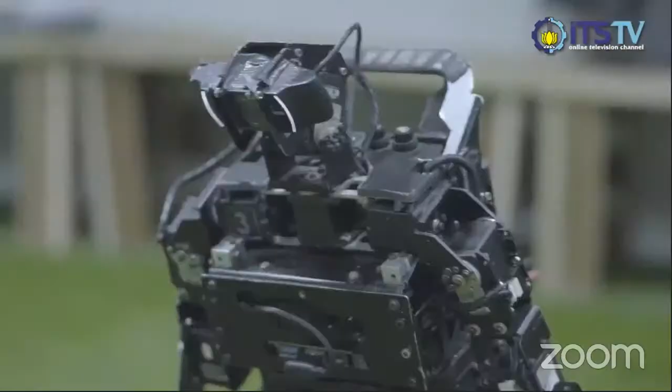ITS is a place for new hopes to grow, an ideal environment for the new generation to flourish in 3 strategic locations within the industrial city of Surabaya. As a smart eco-campus, ITS maintains harmony between technological advances and the sustainability of the surrounding ecosystem.

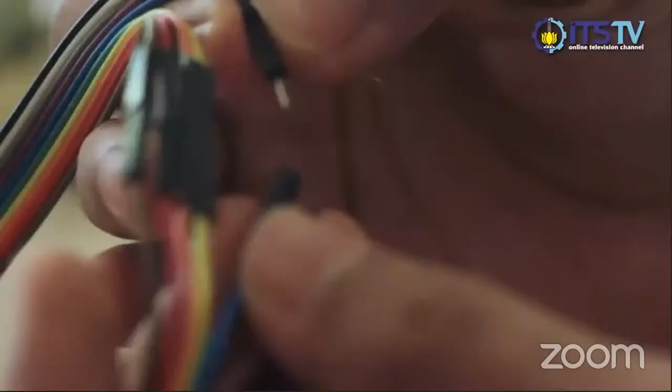ITS has 7 faculties with prospective scientific fields, including Scientics, INDSYS, Vocation, CreaBiz, MarTech, Electics, and CivPlan.

ITS is a space for the new generation who are hungry for knowledge because it provides a wide range of references in both physical and digital form. ITS makes it easier for the new generation to access information by providing flexible classes.

ITS keeps moving forward in facing future challenges by providing the best facilities for the new generation's activities. The facilities support both spiritual and physical needs.

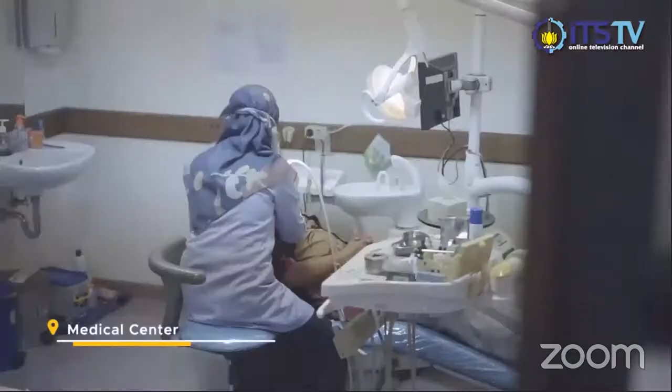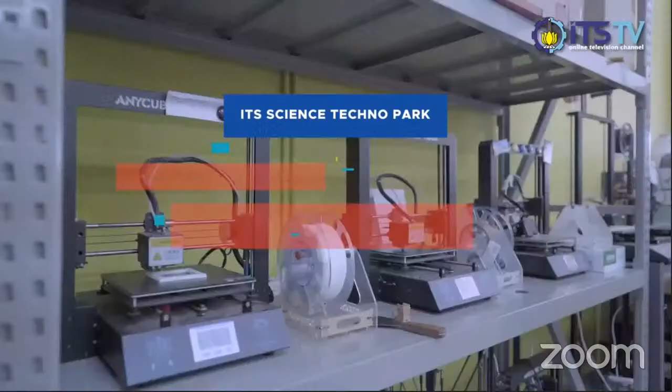ITS also provides research facilities in the ITS Science Techno Park, including ICT and robotics, automotive, maritime, and creative industries. Therefore, the excellent generations from ITS will emerge and make history.

ITS is a space for the new generation to express themselves. ITS is a place where the new generation learns new things and finds their purpose. ITS has become a place where the new generations that carry the future will be born.

ITS is a campus of science and technology, which focuses on research and innovation, presenting technology for prosperity. With a spirit of heroism, ITS brings the future before us. ITS, the University of Heroes.

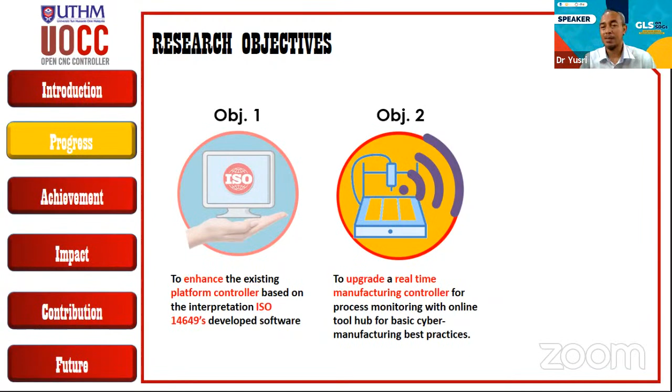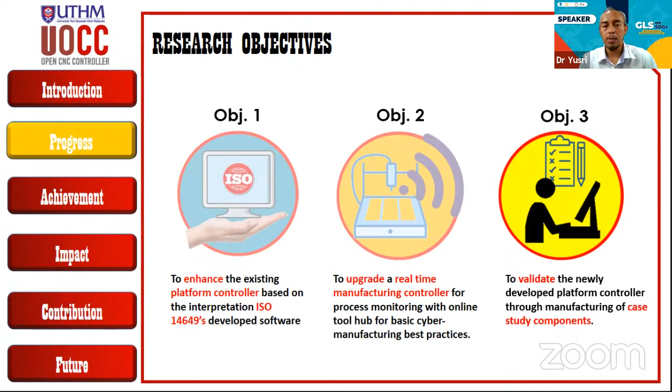So the scenario is we have an old car, not a working car. We change certain parts of the car component, we upgrade the system. So finally we have an old car, but now with the latest technology, maybe with a GPS system. That's the scenario. Finally, we call authority bodies in Malaysia to validate our machine and our system. We don't just feel that we upgraded, changed, or modified it — we don't verify it ourselves. So we call in a third party, in our case a certification body, to check and validate our system. This is roughly about the activity in our research lab.

So part is moving, part is rotating. The cutting tool touches and hits the material, and finally machines it. So machining is what we call removing unwanted material.

I'm sure in this room we have some from the technical machine background and others as well, so I try my best to narrow down the tone of the explanation. Hopefully everyone can follow and understand.

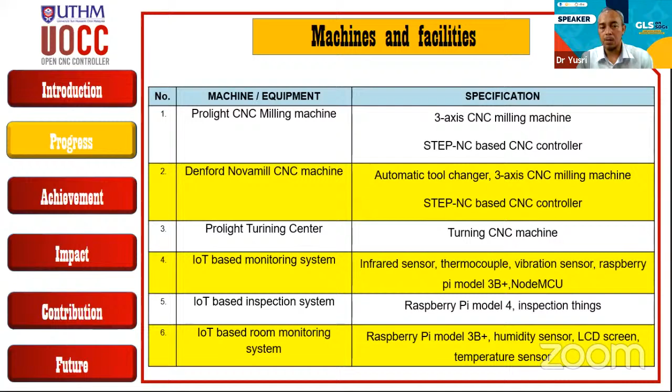The rest is equipped with the system, what we call the IoT system, for monitoring, for inspection, and for the whole system as well. So this is what we apply for the 3-axis machine.

In the slide, before this, you can see the name of the machine. You can see the Denford Novamill machine. We also have the ProLight CNC machine, and we also have the turning machine. Then we equip it with the system.

So that's the machine itself, just the machine. We support it with the system, so the system can communicate and also monitor, and finally generate a report. So as a user, as a customer, they can go to the system and log in.

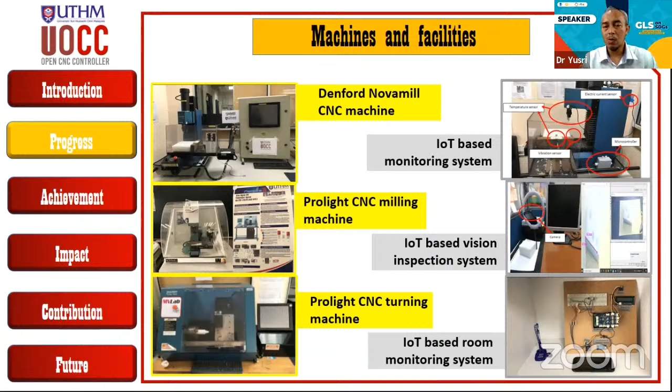Our dream is to utilize our smartphone. Our phone now doesn't only communicate with others, between Malaysia and Indonesia for example, but we try to utilize it to communicate with the machine as well. I want to see this after this as well.

So this is what we call a disposed machine, where our machine is more than 15 years, close to 20 years old. You can see the motherboard, the PC, all types of PC. You can see the blue and dark color there.

This type of PC is very difficult to find now. The machine was used by different faculties, and after almost 10 years we made a decision that the machine is not working, so we disposed of it. We claim it has zero value because it's past its lifespan.

So our group took the opportunity. We discussed among our group members, with students, and the idea is, that's why we call it in terms of sustainability, that this machine should be reused.

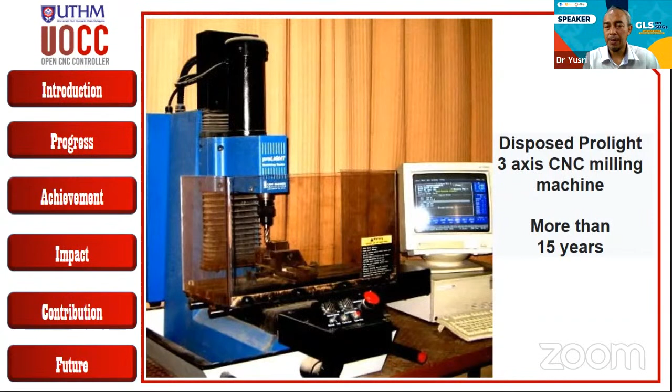So we tried to utilize the old, not-working machine. We tried to change maybe certain parts of the machine, the failure parts, the parts not running well for example. Then at the same time we improved the system.

So this is the spec of the machine. We consider this a small machine, only a 3-axis machine, and small in size too. We have bigger machines than that, but it's very difficult to convince ourselves first, and then to convince others that we have the capability. That's why we start with the small thing.

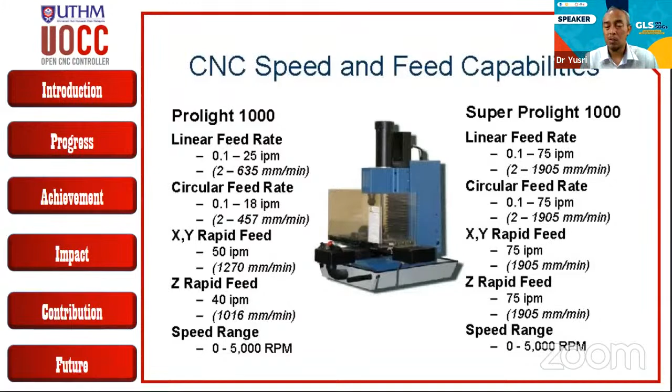So the moral is, when we do research, normally we start with a small scale, where nobody knows what you have done for example. But finally we hope we can contribute something, not only to our institution, our university, but also to our country as well.

So what we do, you can see the first photo and the second one. The main component is there; we didn't change much of the component. What we tried to do is change the software part. The hardware, whatever was working, we kept that particular machine as is, and changed the software part.

So the idea is, before this, if you use this machine, you were only allowed a certain level of what we call the controller. A good example is, you have a laptop and you have a printer. If you buy this kind of laptop, you're only allowed to print with this particular type of printer. This is the original idea.

If you buy laptop A, you're only allowed to print with printer B. So our idea is, you can buy any laptop and choose any printer, because this is what's called universal, and we try to make it an open system.

A closed system is controlled by the manufacturer, so they give you the condition: if you buy this one, you should buy the package. If you buy this laptop, you should also buy this printer. Got the idea? So if you change the printer, you need to change all the laptops or all the controllers as well. We feel this is very difficult when we move to Industry 4.0.

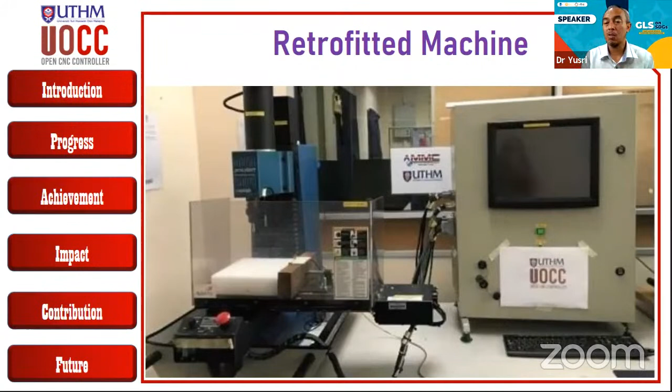This is the idea. So what we do is, we know that the machine has a combination of the hardware, we call that the body itself. They have the controller, the brain of the machine. It's like a printer - they have what we call the controller. Otherwise, how do you send whatever material to the printer? So the printer is one part, the machine is another part. We call that the controller. Then we have the hardware, where we have all the components, the tools, the cutting tool, the bed, the chuck, all the hardware.

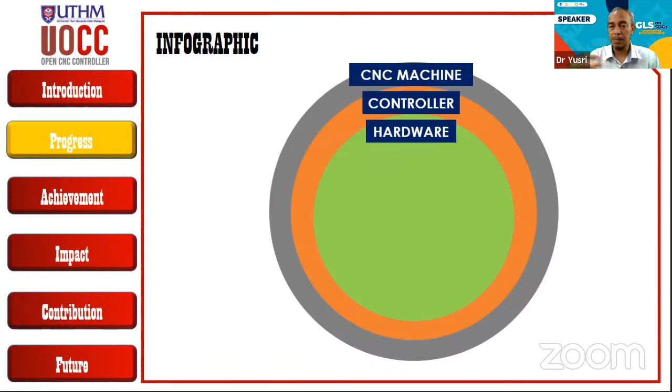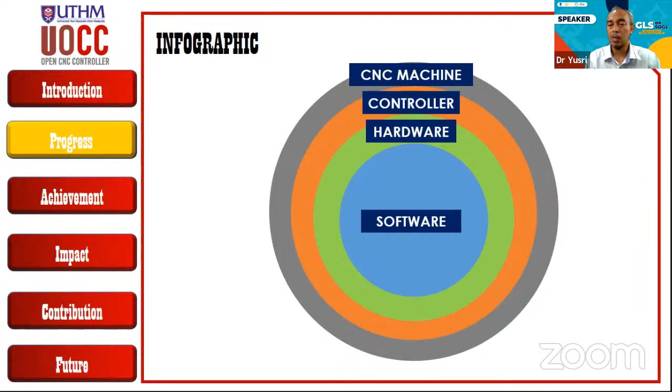And then we have the software. Software is where you control the machine. Like your printer as well, you need to install it, to communicate, to send, to monitor, to give some idea of how I want to change - you want to print 1 page or 2 pages, for example. So this is what we call the controller. So this is our machine.

We have another thing that's totally different, our ISO. The current ISO is ISO 6983, which we call G-M code. If you're familiar with CNC machines, you can't run away from G-M code. G-M code is the language we use to communicate with the machine, and also from the CAD. So when you design something in CAD and want to pass it to the machine, they must have a communication tool able to communicate well.

So ISO 6983 is considered an old standard. Now they've come up with another ISO, we call ISO 14649. ISO 14649's idea is to make it an open system. Before this, the philosophy was you ask for how you want to machine.

For example, I have this kind of mouse. The machine doesn't know it's going to machine a mouse. The machine has no idea. You just insert commands: go this line a certain distance, go this way a certain distance, go that way a certain distance. You insert that to the machine.

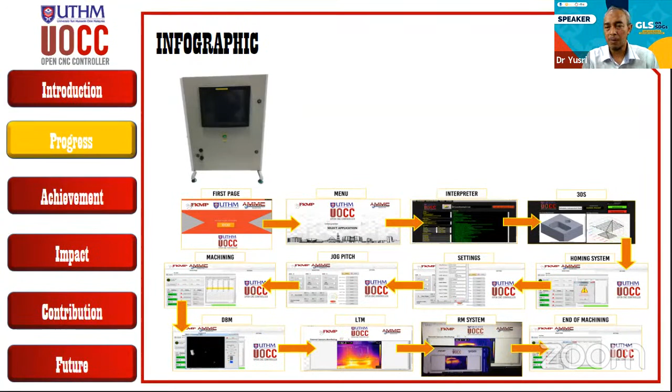Otherwise, there may be two of them communicating, and the third one is not communicating very well. So the idea is we have the system, one to monitor, one to have the camera to make sure where you want to convert from the old system to another system. This graphic shows how they move from one phase to another. After we make sure everything runs well, the final phase is to have another smartphone to communicate to the controller, to the machine.

Now we have the smartphone, we have the controller, and we use Wi-Fi. How do we communicate? We don't want to use wired communication from the smartphone to the machine, so we want to use Wi-Fi. Then we register our IP, which we call OU.

UOCC, Open CNC Controller, as our product name, our brand. So we call it UOCC. We filed for the IP registration.

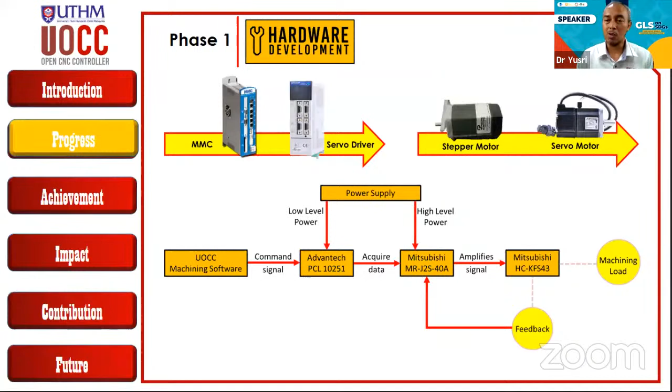The first phase, of course, involves the hardware, meaning whatever we want to use or change. For example, first we want to change the stepper, change to the servo motor, change to another controller. This is the detail in terms of the graphic, the schematic diagram - sorry, too technical - but you can imagine it like changing the engine of a car. Not only the engine, but all the wiring, all the controller, all the other parts are also involved. Not only the engine itself, but how the support tools and communication tools also need to change if we think they're related.

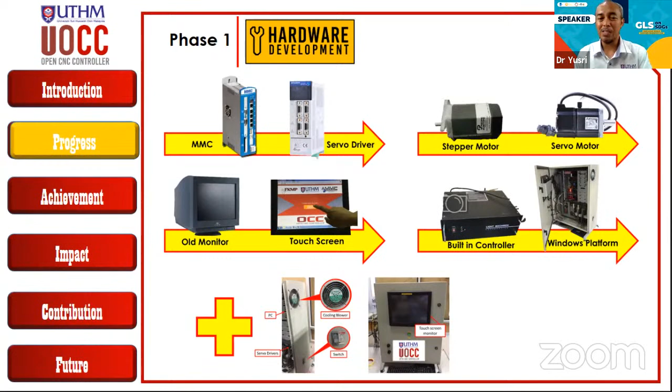You can see the old type of monitor. If you wanted to sell this type of monitor, nobody would want to use it, because we've moved from Nokia to Samsung, so now we have touch screens and so on. So finally we upgrade - you can see from left to right, whatever part we think we can keep, we keep; whatever part we think we can improve, we improve. So finally we got the smartphone.

Now we have the desktop, where we have the system we want to install. It involves the 3D interpreter. We have the main menu, which we call the GUI, Graphic User Interface, where the user needs to key in something, needs to instruct something. This is the main purpose of our desktop.

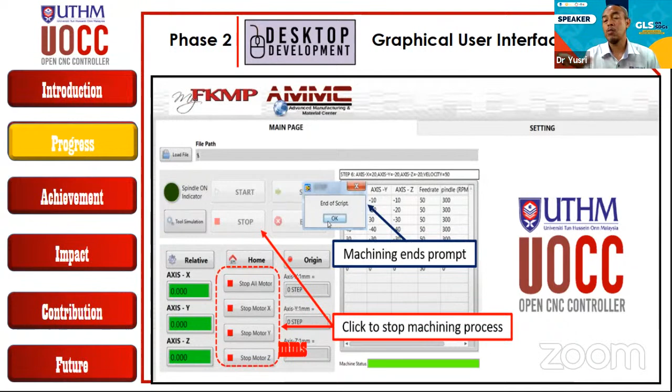This is the print screen, one example. We need to change the number, we want to change the data there. So this is where, for example, certain processes we can keep, certain processes we change. For example, before this, maybe we use tooling machine tool number 1, the second process maybe involves tooling number 2. So the requirement is different, the size is different. This is where we control the system.

The next one involves what we call monitoring. Monitoring is to make sure - before this, we didn't have this kind of system in our machine. So now with monitoring, we can set where is the minimum and maximum, for example the temperature. What happens is you run the machine and the temperature is too high, which affects not only the part but also the productivity and efficiency of the machine, or may even destroy the machine eventually.

This is the issue, because when you machine hard material, the temperature is high, and also the pressure and friction are so high. A lot of things are involved. Either we use a coolant, which just reduces it, but the temperature is still high. So the idea is we set the temperature - what is the minimum, what is the maximum, what is the comfortable range.

So you can see that we have the safe condition where you allow this kind of range. Next one is we have the warning, where they're close to the border. For example, as myself, my target weight is a certain number, so I trigger myself that I need to take care of my diet and my exercise. So this is what we call warning. Then we have the danger, where we need to make a decision to stop the machine. Otherwise they'll be broken, otherwise they will be destroyed, otherwise there will be effect to more danger. So this is the philosophy of the monitoring.

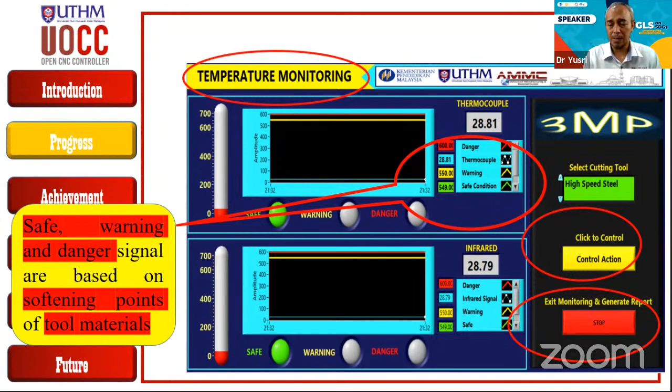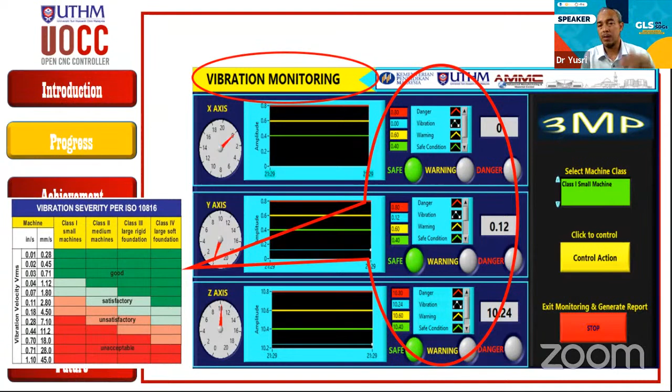Same goes to the vibration, because we know that this kind of machine involves not only the temperature, but also the rotating vibration. That means when you rotate something, there must be vibration there. So that's why we need to control the vibration. Same as well, we have the zone where it's very safe, then we have the warning, and also the red zone we call that, where we need to make a decision to stop the machine.

Allow me to have some water as well. Excuse me. Yes, Prof.

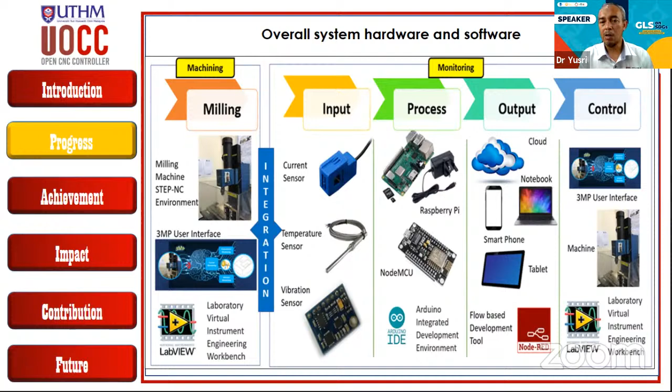So a lot of things involved. You can see that this research not only involves technique machine, but also involves technique electric, and also involves computer science or IT as well. So because we do the cross discipline, now a lot of things talk about multitasking, cross discipline. So you can see my idea maybe I can solve something about the technique machine or manufacturing, but how about the programming? How about the sensor? How about the IoT? How about the smartphone, for example? So that's why a lot of parties are involved.

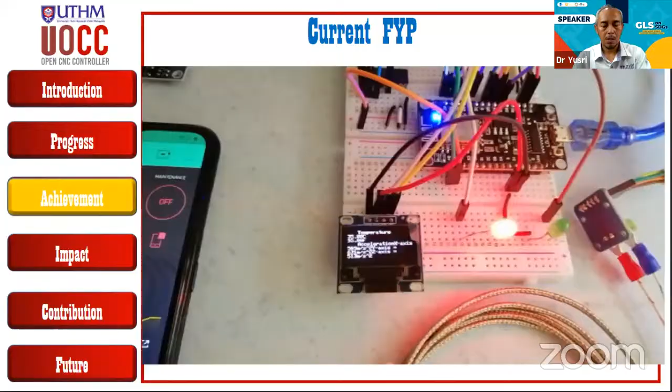So hope I can play this short video. You can see. Oh, sorry. Works well, right?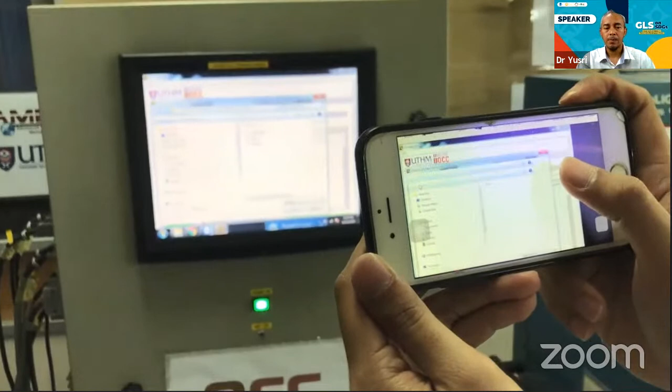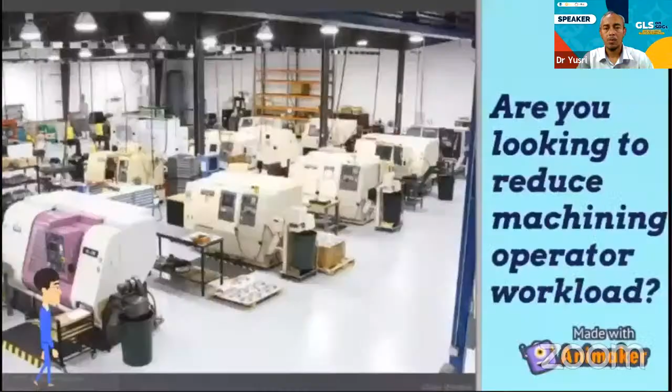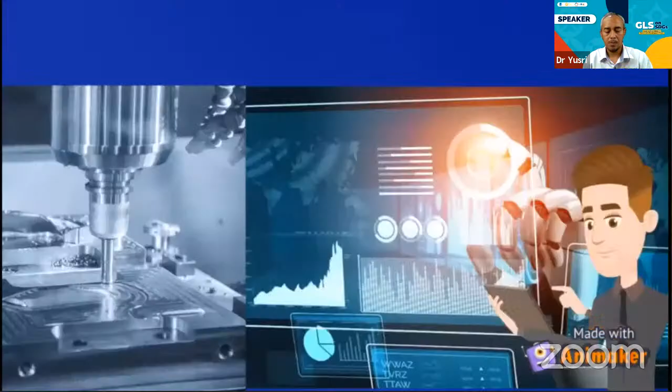Machining process monitoring challenges that we are facing today. Are you looking to reduce the machining operator workload? Reduce complexity for faster response? Integrating CNC machine tool with emerging technology? Looking for a solution?

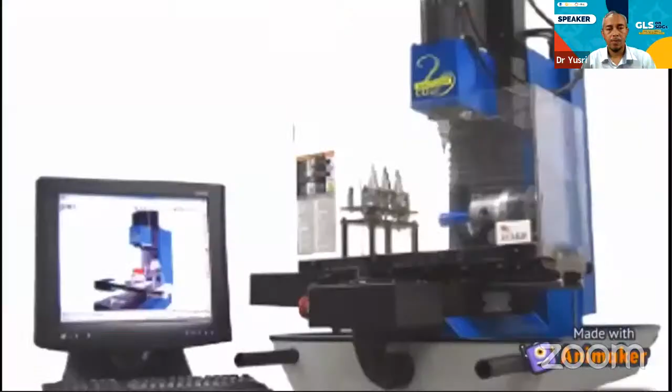Don't worry, we got the solution. Towards Cyber Physical Machine Tool. Modern Monitoring Milling Process, 3MP. 3MP is an IoT-based monitoring system developed under STEP NC environment. 3MP system is a network of CNC machine, central computer and mobile device. It is an integrated solution that securely connects CNC machine and other mobile devices using a single IP address. It provides an integrated communication solution that enables CNC machine to be monitored without an operator present near the machine.

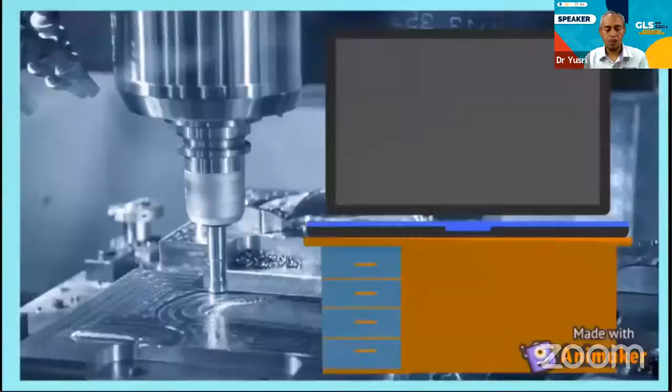3MP captures machining information such as cutting tool temperature, spindle current and vibration of cutting tool and workpiece interaction in real time via Wi-Fi module. It is a powerful system that helps detect unseen machining critical events even through the office. 3MP enables alarms to be given during movement, anytime, anywhere, in a virtual manner. 3MP reduces workload by sharing the same information in real-time through any mobile device, reduces complexity by advanced human-machine interface and monitoring visualization, and enables control of machining information through monitoring and machining integration.

Great, thank you, my pleasure.

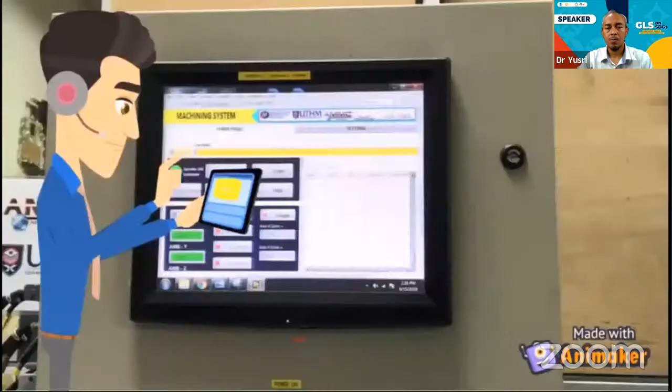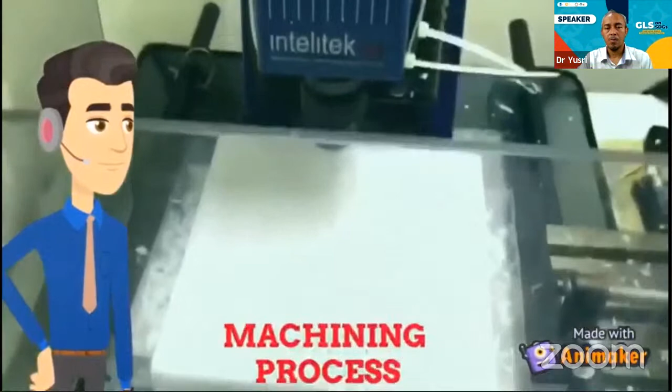3MP system validation. 3MP system implementation on Intelitek CNC milling machine. Machining setting. Machining process. Web-based monitoring.

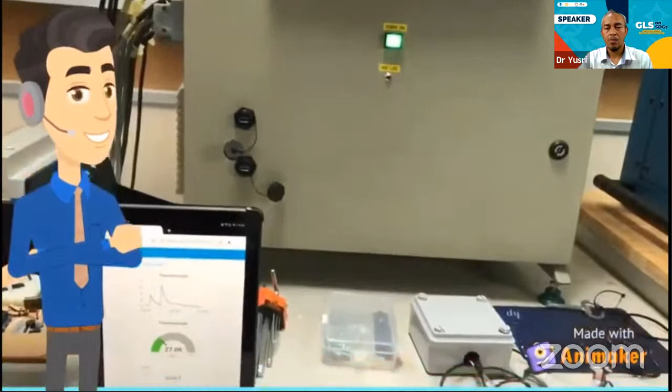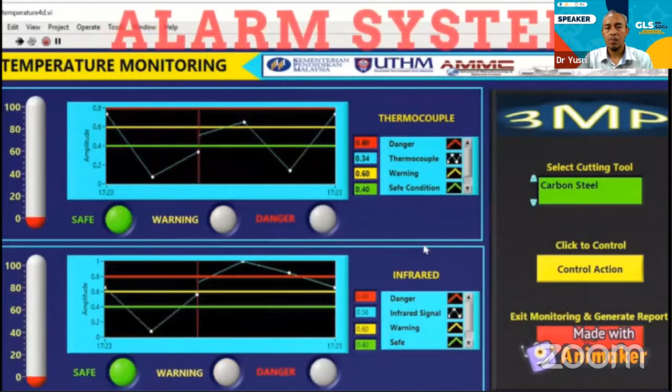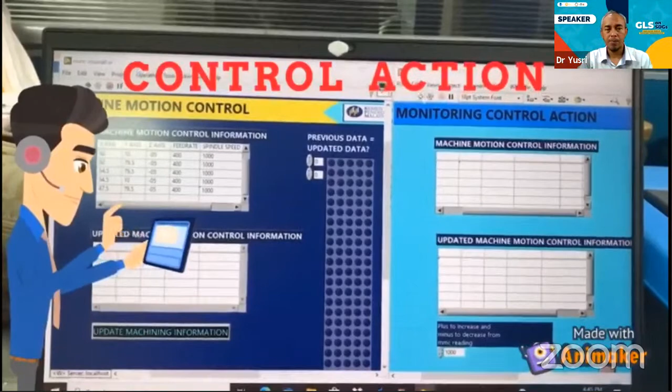Alarm system. Control action by machining parameter control. Report generation. Sound interesting? Contact for details.

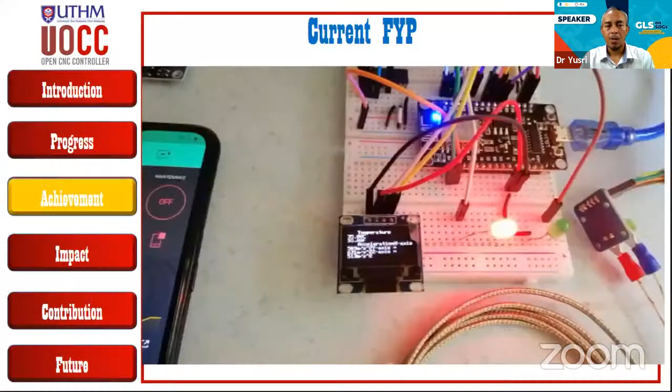Okay, the next one involves my PhD students. Three of them: one is considered completed, another one is waiting for Viva, and the next one is at the end of the thesis writing process. But the next one is only my final year project—this is our final year project, undergraduate. Before this is a postgraduate.

So this project came up with a model that communicates through the smartphone. At the end, they notify our WhatsApp, our SMS. But in this case, we notify whatever notification comes to our email.

So this is undergraduate. We use the smartphone. We can read the data, we can generate the data, and we can control as well. And whatever notification we can send to the third party as a user, as the owner, as the manager of that particular company or factory, for example.

Okay, notification—in this case it goes to the email. So this is, you can set whatever. So monitoring is one thing, but reporting is another thing. Otherwise you have the issue of how to control, but to make sure it comes to the appropriate person in charge. They need to make sure they take immediate action.

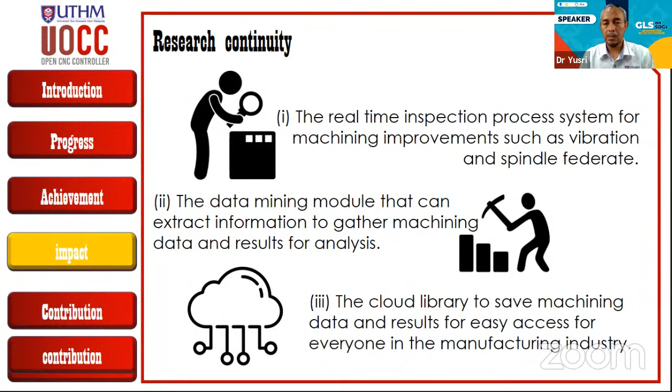This involves data mining, of course, this is involved in data mining. We have to span to the cloud as well. So at the end, the cloud is another component to store our data. So another contribution is...

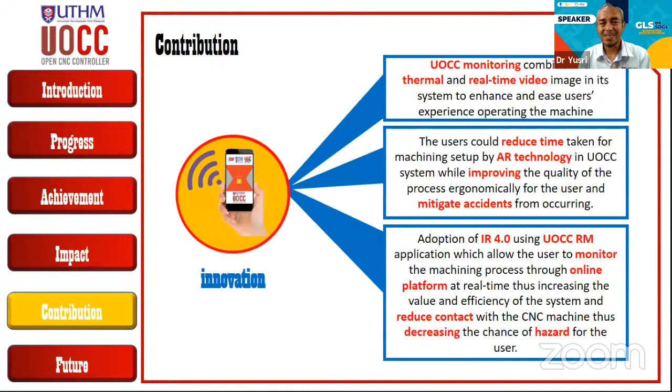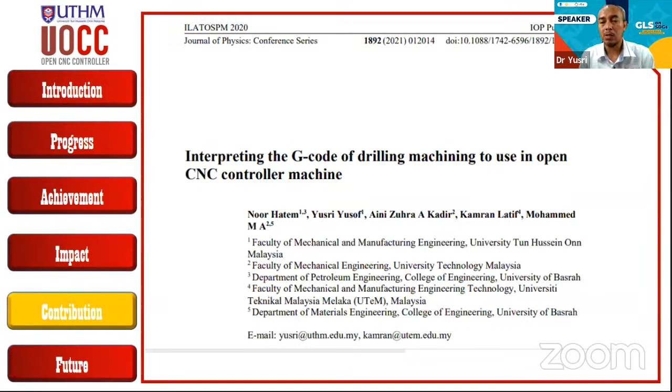This is 2021. You can see in 2021 we also managed to have 4, I think—yes, 4 papers from that particular project. And still waiting on another 2 under consideration. We got the first round of major revision by the middle of this month, hopefully, or next month. We hope we can respond back to the editor.

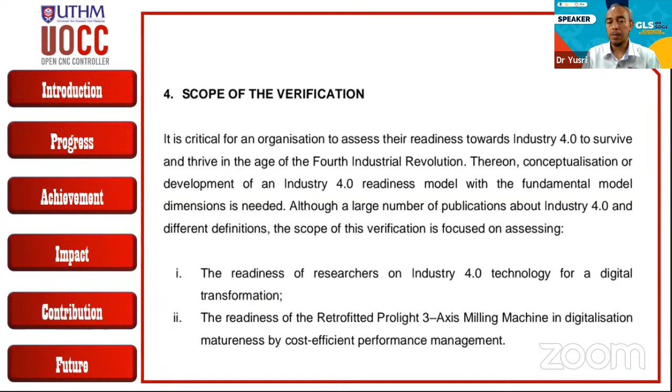That's why we call that retrofitted Prolight 3-axis machine. So this is the conclusion.

So you just imagine we have under IR 4.0 a lot of pillars. They claim that we apply AR, we apply integration, cloud, IoT, data security, simulation, and so on. This is the most component under IR 4.0, verified by this body.

And another thing is giving the idea how we can upgrade our lab from the level of laboratory to center of excellence. So this is a report from the authority body.

We hope that we can get more collaboration from institutions, others, hopefully from ITS as well, from our partners from Indonesia, Malaysia and others. We can use this, we call it proof of concept, because certain requirements for our big fund, they're looking for the proof of concept. So that verification we can use as a proof of concept.

We hope that we can have more PhD students to crash their brains, to explore the opportunity for this kind of research in our lab. We also feel that this is a part of collaboration. So this sharing session, we feel, is also a part of recognition.